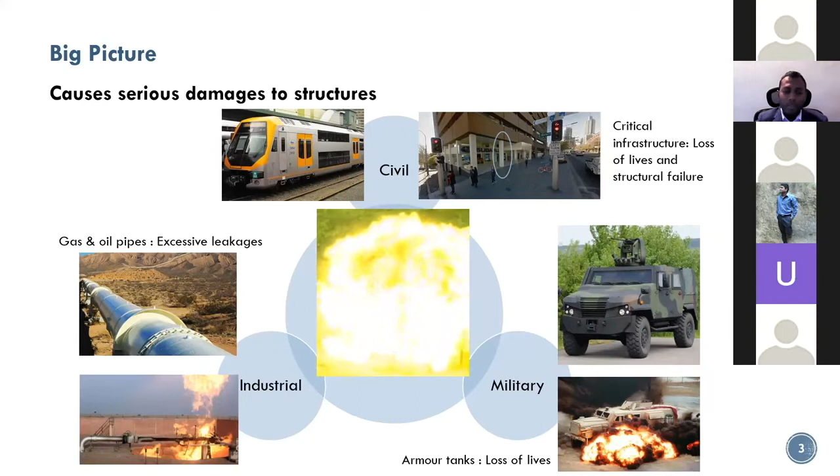So as you can see, if there's an explosion in any one of these structures, and of course the list can go on, it could be quite fatal, and it can cause serious damages to structures. And of course, it's not limited to structures. We as engineers, our main goal is to save humankind, and in doing so, we want our structures to be safe.

An explosion can cause serious fatalities to humans. Broadly speaking, we categorize the fatalities into two categories: primary and secondary. Primary is to do with the immediate explosion event - I'll explain what that is in the coming slides. Whereas the secondary injuries could be some of the after effects of the explosion. The primary injuries are the major concern, but even the secondary injuries can cause serious damage.

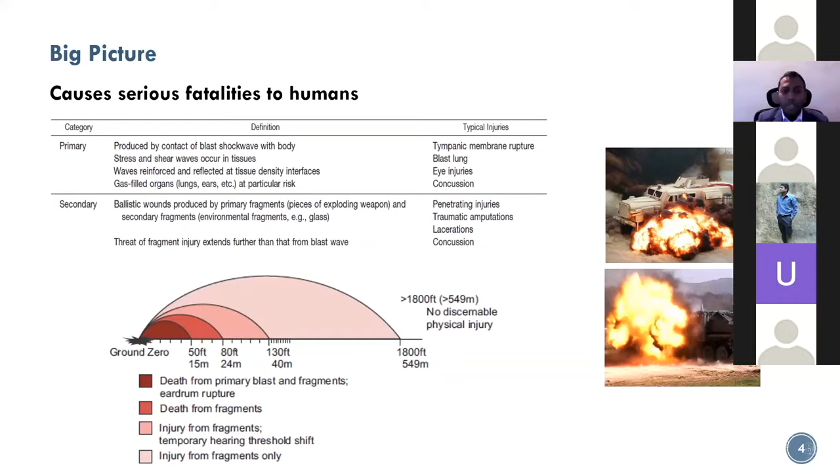Once again, this is not only limited to military applications, although the two photos I put on this slide are military related. If there were to be an explosion somewhere, the extent of the explosion is not limited to the immediate vicinity - you can feel it further away. So that is why it is important to understand what's going on when the blast happens.

To sum up this big picture idea, let me use an example - a roadside bomb that could hit an armor vehicle. So basically one thing that could happen is the structure - the armor vehicle itself can get damaged. This is the structural side of failure. Or the person or people inside the armor vehicle could be injured, or quite unfortunately could even be killed.

So there are two things that we are mostly interested in when it comes to blast, and I've summarized it here in this slide. One is the excessive pressure - there's this idea that there's a sudden rise in pressure when there's a blast, and that pressure can be felt by the people inside. That can cause harm to the people, and that pressure can also cause harm to the structures. And secondly, there's a phenomena called scabbing.

Now that's to do with damage to the structure. When this happens, there could be particles that are ejected out of the structure, and those can act as high velocity projectiles, right? So those are fragments that were not part of the initial blast event, but can contribute to the negative impact the blast could have.

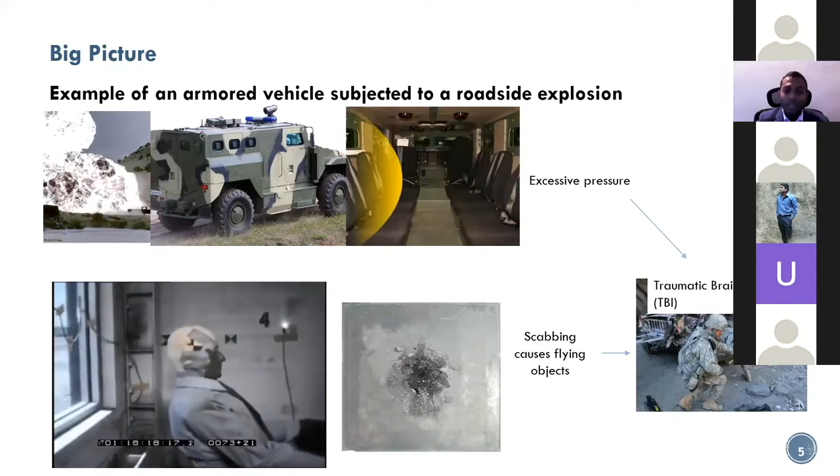So both these aspects affect what's called traumatic brain injuries. This is commonly found in most soldiers, but even people who are exposed to blast can experience these conditions. So I hope by this point you have an idea as to why blast engineering is important. It's not always very commonly followed when it comes to civil structures, but we live in a world that quite sadly is no longer safe, whether from intentional or unintentional explosion. So we as engineers need to be mindful of that to ensure the safety of our structures so that we can ensure the safety of its occupants.

So from this point onwards, I'll be cutting to that first point I mentioned about blast. So I'll be talking about blast now - how does a blast occur and what can it do, right?

Generally, in the creation of a blast, we say that there could be shock waves - sometimes we refer to them as blast waves, the terms are sometimes interchangeable. There's generally a violent change in pressure. Now, this is not only seen in blast - of course, things like the three images that I've given at the top also experience violent changes in pressure. But what we are dealing with in blast is a very unique situation, where all these things will have that violent change in pressure as the common factor.

What we see in blast is a very, very unique phenomena.

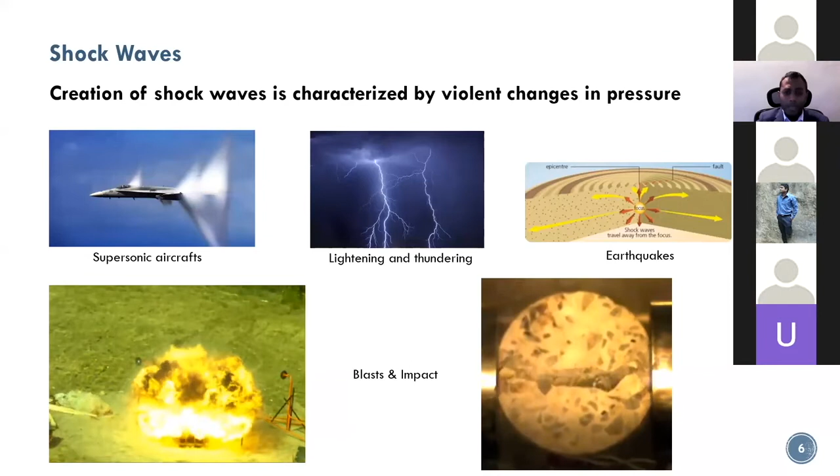So this is what happens in a blast basically. Firstly, there would be an explosion, or there would be an ignition. Sometimes we use the word detonation. In the case of weaker explosives, we use the word deflagration. That simply means that it starts. There is a blast.

The immediate thing that happens is there's an extreme rise in the temperature and the pressure. That's almost immediate, and it's very hard to even assign it a time. As you'll see in the next slide, everything I've shown here in this flow chart happens within a matter of milliseconds, so it's very hard to assign a time to this.

So the sudden rise in the temperature and pressure is then accompanied by the expansion of the gas. So the air expands. As a result of this, a layer of compressed air propagates outward. This is what we call the blast wave. So there's compressed air that is full of energy, that is at high pressure, that tries to move away from the source of the blast. This is what we call the positive phase.

But this doesn't stay forever. There is a sudden rise, and then that effect decays. We say that it decays exponentially, it decays almost immediately. Because of the overexpansion of the air, there can be a reversal of the flow, and this is what we call the negative phase.

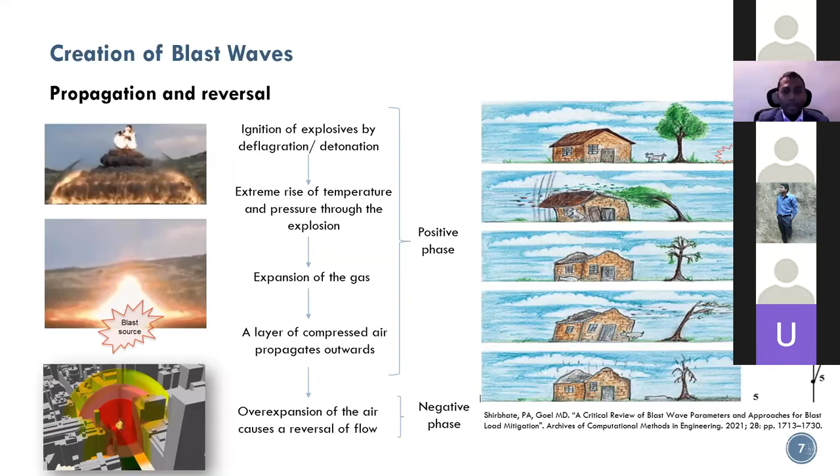So let me put that into a graph and bring in more engineering terms. Now you have a fairly standard idea of what a blast can do. But now as engineers, if I can put that entire sequence of events into a graph: if there's a blast at some place, this is the pressure time history you would see. The pressure, as you could see, is in kilopascals with quite high values, and the time is in milliseconds. As I told you, this entire event happens within a matter of milliseconds.

So a couple of things I want to highlight here. Before the blast occurs, what you have is the atmospheric pressure, or the ambient pressure. So for a few seconds prior to the explosion, everything's at that atmospheric pressure. And then there's a sudden rise.

On the horizontal axis, I call it the time of arrival. At a certain distance, within a matter of milliseconds, the blast wave arrives there. You can see even in the simulation running in the left corner, that red patch, the high pressure, starts from the left-hand corner and propagates to the right. So if you think of a point somewhere in the middle of that figure, it will suddenly experience this rise in pressure, and that maximum pressure is what's called the peak incident pressure.

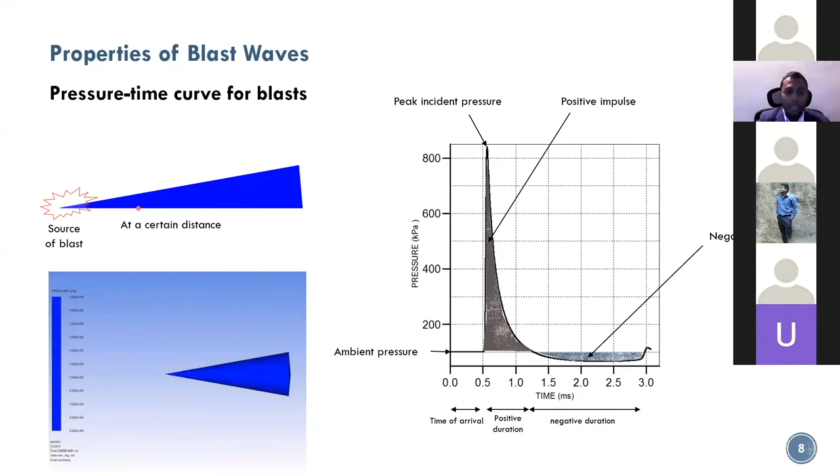So there's a reduction as you move away from the charge source, which is generally a good thing for us as engineers, because what this tells us is unless the blast happens in the immediate vicinity of a structure—maybe, not always—our lives are made easy because there is this significant decay in the pressure.

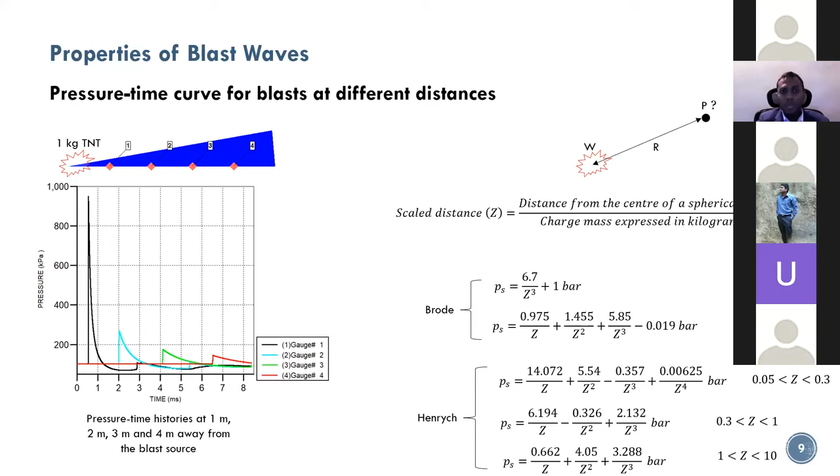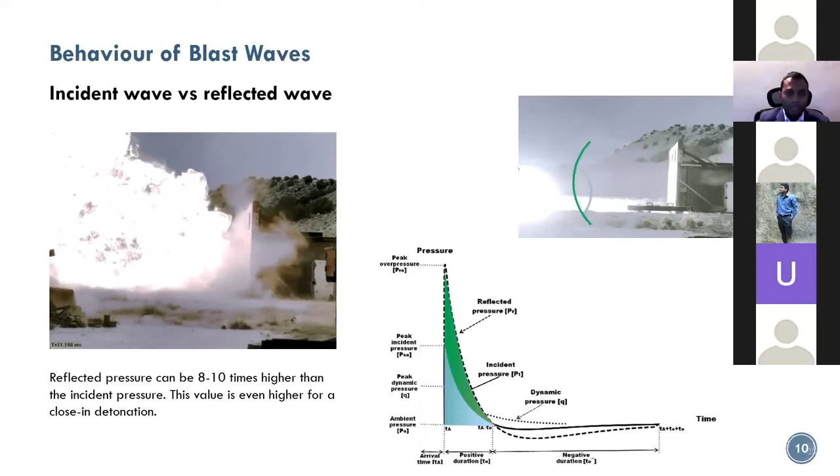When there's an air blast that's not necessarily free, part of it will go and hit the structure, but part of it will first hit the ground before interacting with the structure. There are reflections, meaning a significant increase in the pressure felt by the structure. You can also have a surface blast, when the source is on the ground—then we'll have a hemispherical blast wave propagating outwards, and once again we'll have to consider the effect of reflections from the ground. Depending on the location of the charge relative to the structure and the ground level, the effect felt by the structure will be different, because each case presents a unique situation for how the blast wave propagates.

So this is where the first part I wanted to cover—the blast side of things—ends. I just wanted to give you a brief idea of what a blast is. My next area is how structures behave when there's a blast. I know there's a Q&A at the end, but if there's anything you want to clarify before I move on to the second part, I'm happy to do that now.

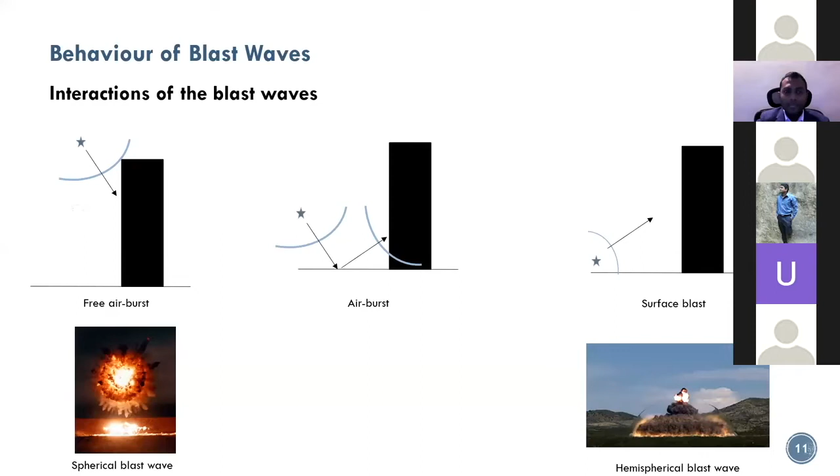It's like no questions. Right. Okay, we'll continue. Right.

By this point, you would have some kind of an idea of what happens when there's a blast. There's a sudden rise in pressure, but that pressure decays with distance. So these are some of the key things we observe when there's a blast.

Now when it comes to structures, we've identified that there are pressures and impulses that we can quantify when there's a blast event. So now we want to know how our structures behave when there's a blast event.

To understand this, first we need to understand a little bit of the way materials behave when there's a blast, because structures are made out of certain materials, whether concrete, steel, or any other kind of material. We need to understand what really happens inside a material if you have to accurately quantify the response of a structure.

So there are two ways of looking at this effect of the blast. I've categorized it either based on the strain rate, or based on the response of the material. Let me explain what I mean by those two.

The strain rate, which is not something we generally use in static loads, relates to the strain divided by time. It has units of 1/seconds, or 1/time. You can also explain it in terms of velocity divided by length for a given element.

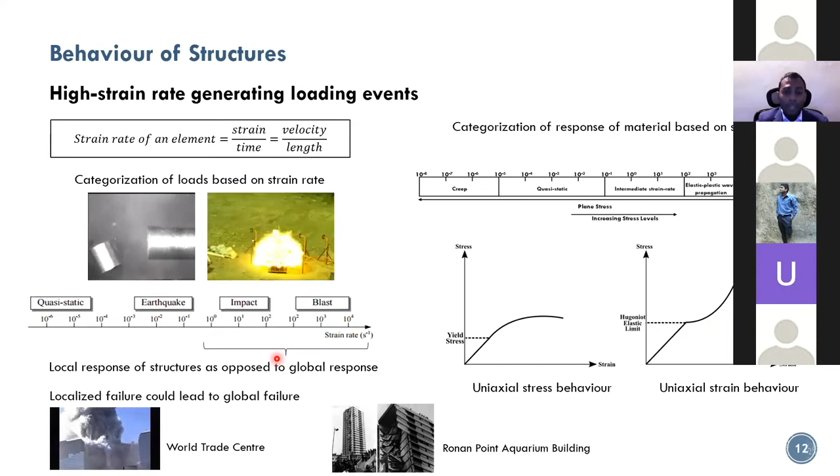But now when we get into the structure, the level of the structure, how do we determine the response of the structure? This is the question we're interested in as structural engineers, so I've titled this 'quantifying the structural response.' One of the techniques we have is using the single degree of freedom system.

This is something we commonly use for dynamic loads. Or we can use the energy theorems, because we know in a blast event there's energy dissipated as kinetic energy from the blast source, and these are absorbed as strain energy by the structure. So by comparing the two, we can also do an analysis, but this is a very basic way of quantifying the structural response.

We make use of the basic single degree of freedom system equation. We can use things like damping - I've excluded it here, but there's a certain level of damping in most structures that we can consider. We simplify or idealize the blast load as a triangle, not the exponentially decaying one I showed earlier. We can approximate it to be a triangle, and this is the traditional way of quantifying the structural response. The question I want to leave with you all is: is this a simplification of the actual scenario?

For one thing, we are simplifying the blast load - is this able to capture some of the complex ideas I told you earlier? Things like reflected pressure are very hard to quantify through this sort of model. This is where we actually need numerical simulations, finite element simulations, where we can model the blast event, simulate it, and see the full picture. I'll show you some of it towards the end of the presentation, but this is generally how structural engineers quantify structural response under blast. This is good as a basic estimate.

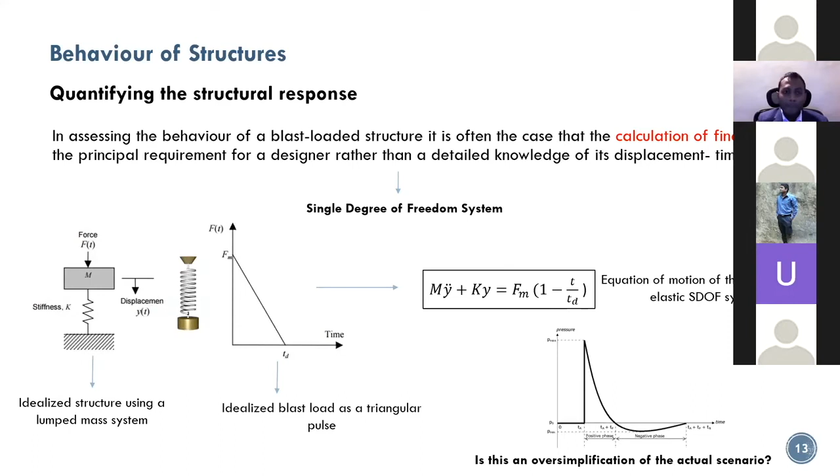Another key thing we want to know in terms of designing structures is how much structural protection we should offer a structure. The thing with blast is there are two things that make protecting structures very difficult for us. One is blasts are unpredictable - it's not like designing for static loads where we know the expected loads. You can design the structure to resist, say, 1 kilogram of TNT, but the next day someone can carry 10 kilograms of TNT.

So there's no guarantee that the structures we design are safe for any given scenario of blast. The blast event itself is highly unpredictable, so there's only so much we can do as engineers.

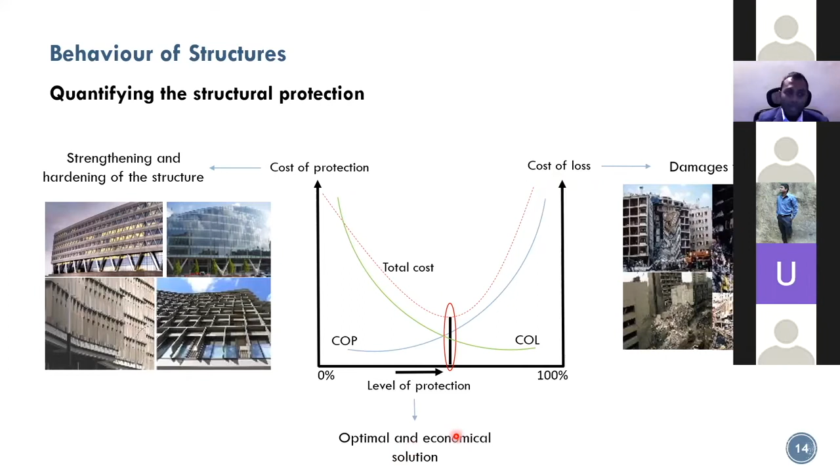We need to accept that there needs to be a certain degree of compromise between protection and loss, because there is no way we can offer full protection, nor can we allow full loss, since we are responsible for the structures we build. So it's important to quantify the level of protection we're going to offer to a given structure, and then we also need to be able to quantify the structural integrity.

The resistance time relates to the natural period of vibration of the structure, and even damping can come into play. In this initial region, we're dealing with impulse, but as we go further from the blast source, we're mostly interested in the pressure, because the pressure acts for a longer time compared to the time it takes for the structure to resist it.

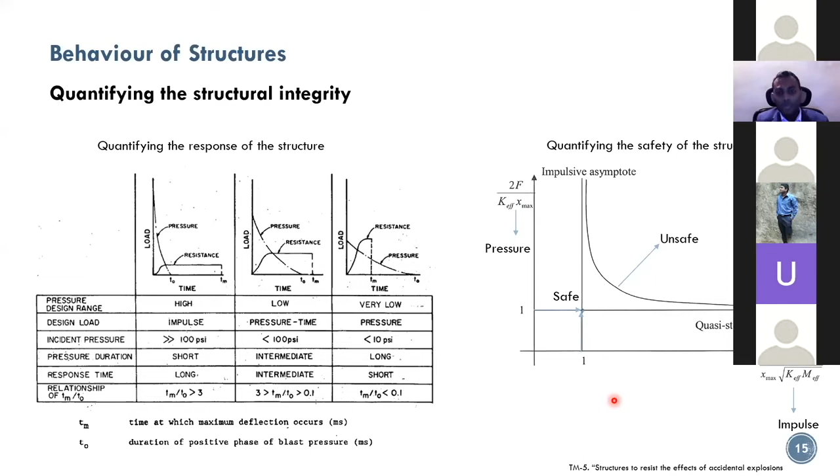One is barriers - barriers are where you expect the explosion to happen inside the structure, maybe because it's storing explosives, or even, like recent events in Sri Lanka, gas explosions inside. So our structures are to be designed as barriers. When dealing with barriers, we're dealing with internal explosions, so there could be internal reflected pressures, and we need to make sure we design our structures to resist that. To this end, we have the idea of vented structures when designing barriers - a more advanced version of ventilation, to make sure the gases that can cause explosions, as well as the excessive pressure when there's an explosion, can move out of the structure easily. We're creating a free pathway for it to move out. So that's if our structure is a barrier.

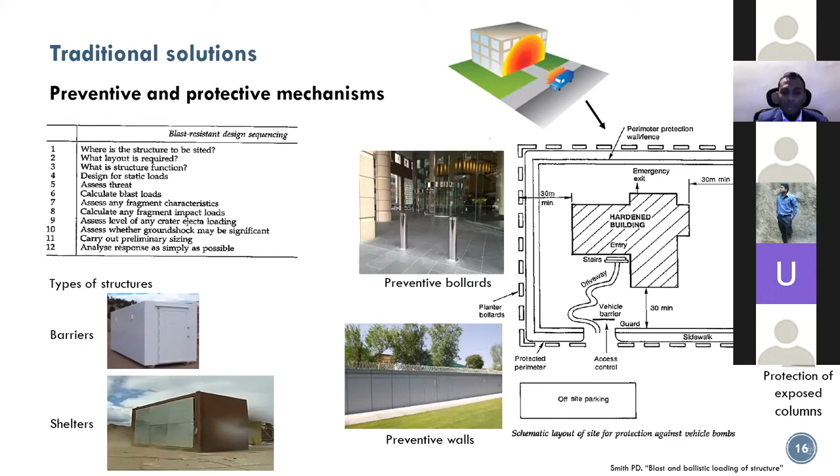So these are two ways of dealing with securing our structures. Either it could be preventive, avoiding any harm from reaching the structure, or in case the structure is harmed, we want to protect it. We'll be looking at some of this in the coming slides.

So this is where I'm going to enter into reinforced concrete structures. We now understand that we need to decide what the function of the structure is. The most commonly used material for building structures is reinforced concrete, and generally for blast engineering, reinforced concrete structures are preferred. I'll show you why in one of the later slides.

Now the material behavior under blast load is also very important. I showed you earlier the accurate description of the material behavior - it's a uniaxial strain condition, where the stress suddenly increases with the strain. What that would mean is the strength properties of a material also increase with the blast load.

So we factor that in using what's called the dynamic increase factor, DIF, where we multiply the static property by that. So the DIF is generally more than one, more than unity - that way a dynamic property is actually more than a static property.

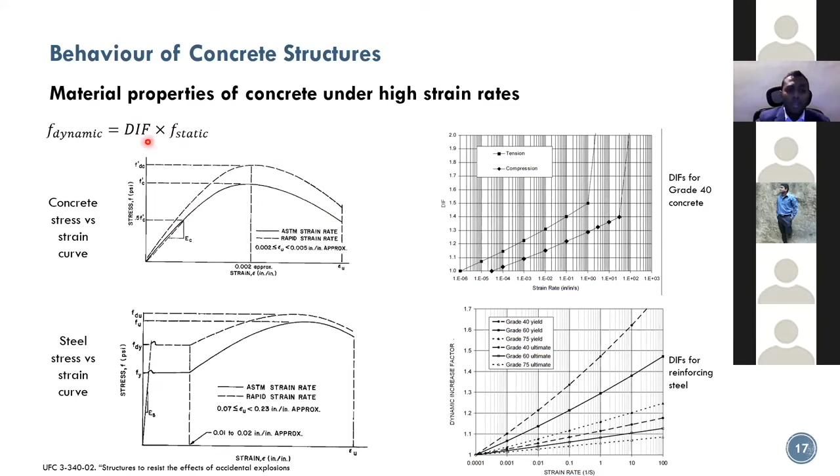So in terms of reinforced concrete design, generally when there's a blast load, the reinforced concrete element will try to absorb it. There's energy exerted onto the structure, and in the form of strain energy, the elements in the structure will absorb it. Under that, the elements will try to deform - so that is what you will get, elements deforming.

Some level of deformation the structural element would be able to handle, but beyond a certain point, you might start seeing failures - we call those failures, which can be either partial or total. To determine an acceptable level of deformation, we broadly categorize the rotation at the support. Think of a simply supported beam - you get rotations at the support. Depending on the angle of rotation, we classify failures into three types. The first type is where concrete is capable of handling the blast load on its own, as in the concrete as well as the reinforcement in it is able to handle the blast load - this is where if the blast load is small, it's able to handle it.

But if the blast load is more, if the angle of rotation is between 2 and 5 degrees, the concrete will crush and will not be effective in compression anymore. So we need both tension and compression reinforcement to carry that kind of deformation. Although the concrete crushes, the concrete cover on both surfaces will remain intact up to 5 degrees of rotation.

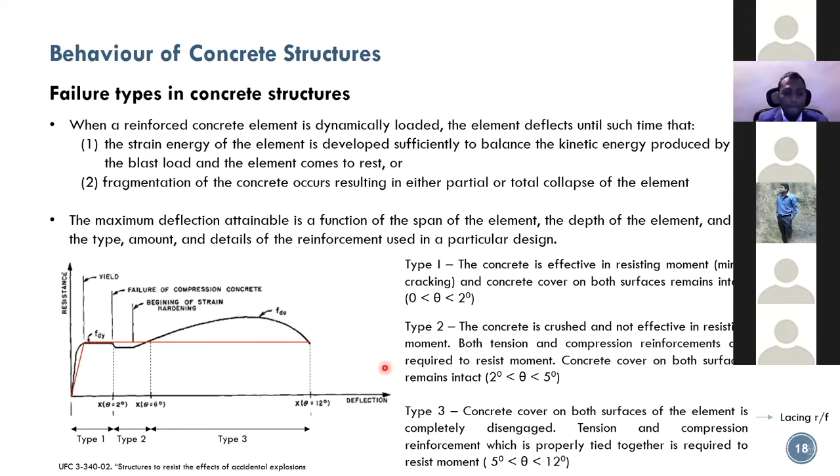So for the shear reinforcement, generally we have the single hook shear reinforcement if the blast load is from one side. But if we're expecting blast loads from both sides, then we need to have our hooks on both sides to make sure we don't create any failure planes.

But now this idea of lacing reinforcement is where it's like a spiral that connects our flexural reinforcement. So this is a stronger connection between our flexural, the tension and the compression reinforcement, than the shear reinforcement. You will get this for both our longitudinal and transverse reinforcement. So lacing is a very important aspect if you're designing blast resistant structures using reinforced concrete.

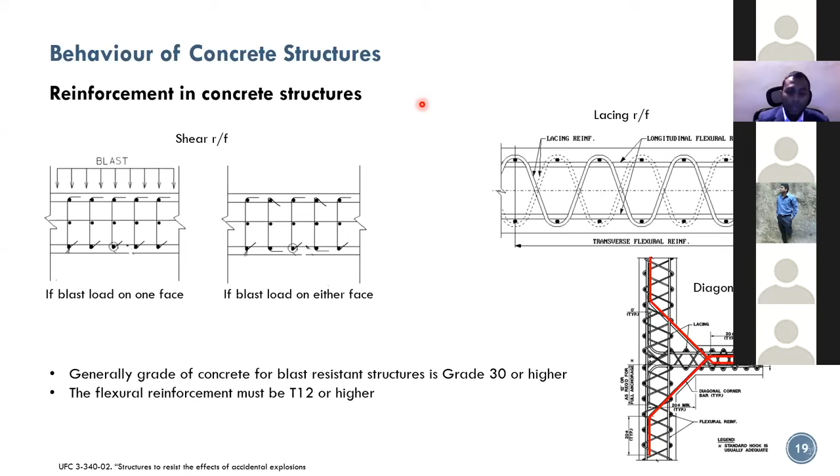Generally, for close-in loads, the steel will not be able to handle it, and there will be things like melting that come into play. Generally in reinforced concrete design, you can do separate designs for bending, shear, and torsion, whereas in steel, all that has been combined into one design.

And in designing the sections, generally we go for slender sections in steel, so you will get local instabilities and buckling that can cause serious effects. And also the joints, generally either welded or bolted, may not be as strong as some of our reinforced concrete joints that are heavily reinforced.

So because of that, generally you will find steel not as the entire structural element, but as certain parts of a structure, for example as a door. So when you're only fabricating parts using steel, you're able to control the properties and come up with a structure that can resist.

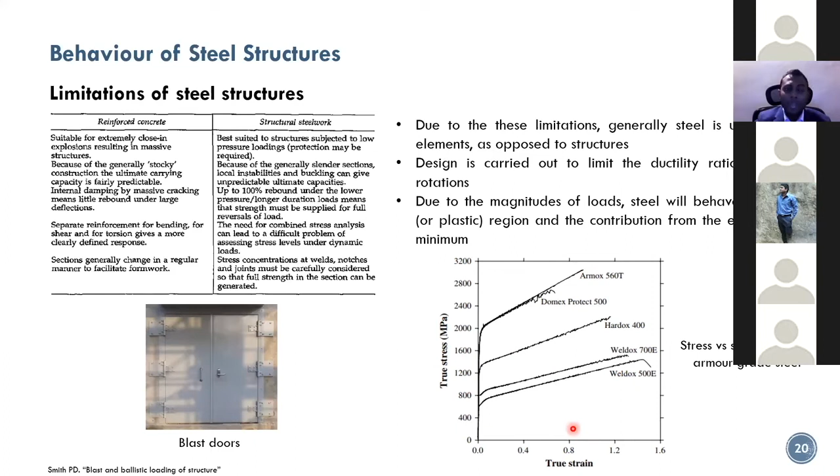So to wrap up the presentation, this is the last bit where I'll present some of the more innovative methods of enhancing the structural resistance of structures expected to undergo blast loads. This is directly from the work of my thesis.

Okay, I have a question. If it's okay, I'll answer that soon. Will the ductility or brittleness affect the behavior of structure during blast?

Yeah, it plays a very significant role. I might explain that more in the coming slides with this idea of my thesis. You need ductility basically. Enhancing the reinforcement in reinforced concrete is a way of enhancing the ductility. Generally, the expectation is that you let the structure deform, because there's a high level of kinetic energy exerted from the blast onto a structure. There'll be a lot of strain energy the structure will have to undergo, so you have to let the structure deform. When there's significant energy, you need to let it deform. If you want it to deform without failing, then you need ductility, because if not, it's brittle, and you will basically have catastrophic failures, right? So ductility plays a significant role.

So coming back to this slide, what I proposed in my thesis was a multi-layered system, or a multi-material system. The inspiration for that is, of course, you see multi-materials and multi-layers in nature. Almost all the things we see in nature are either multi-layered or multi-material. What we see is the materials are arranged in a certain way so that it can fulfill a certain function.

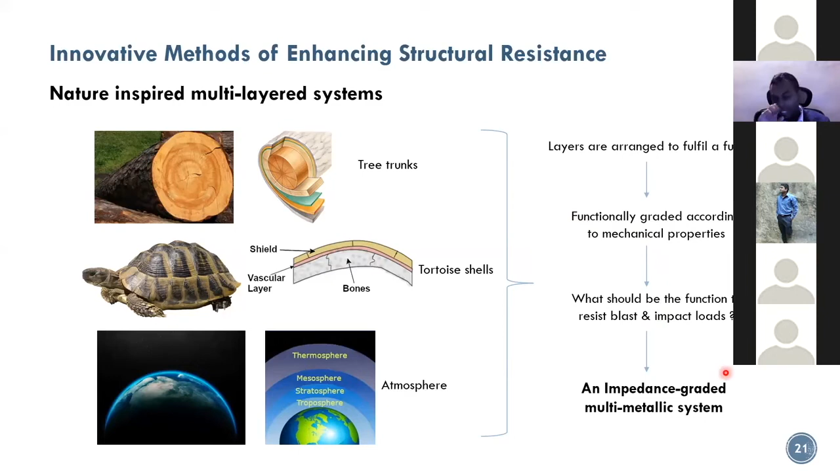So what I proposed was an impedance graded system. This property, impedance, is to do with the density times the wave propagation. Density is something we know. Wave propagation is that idea I explained a few slides earlier.

Now when we are dealing with blast loads, we need to think of it as the structure getting loaded in the form of waves that propagate through the structure. The accurate way of representing a structure under this kind of loading is to consider the wave propagation. Because of that, impedance becomes a suitable candidate to design a material system, because by changing either the density or the material type, you can change these properties.

So what I proposed was, if we arrange the materials, as you can see in this figure, in reducing order of impedance, with the material with the highest impedance facing the structure, facing the load - so we think of an incident wave. It goes and hits this interface between the first two materials. Part of it gets transmitted, part of it gets reflected.

This is similar to what happens in an atmosphere. Not all the rays emitted by the sun reach the earth. Some of it reaches the ground, some gets transmitted, some gets reflected. That's to do with the properties of the different layers we find in the atmosphere.

Similarly, if you design the system so that the impedance reduces through the thickness, we can cause some of the stress waves to reflect. So only part of it will get transmitted. This way we can reduce the effect of, or reduce the magnitude of, the stresses a structure would experience. So that's the idea.

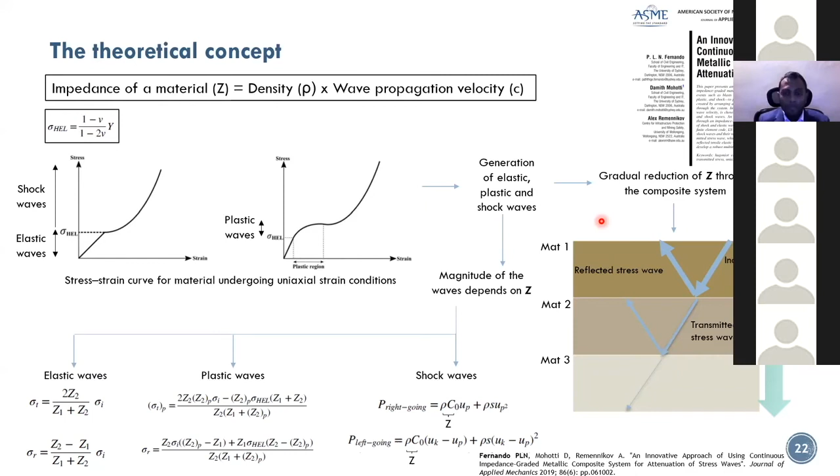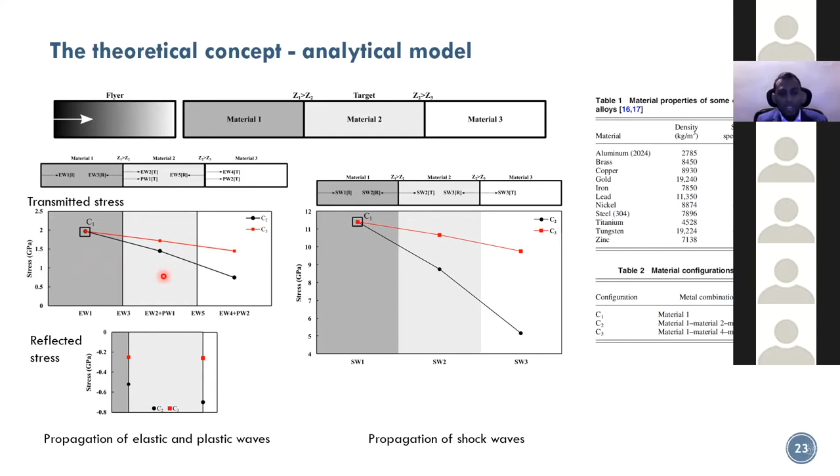So this was the basic concept that I proposed in the PhD, specifically in relation to blasts. To test this idea, we had to fabricate a multi-metallic system consisting of steel, titanium, and aluminum.

Welding is the way we generally connect materials, but normally the standard way is fusion welding. That won't do because these are different materials with different mechanical and thermal properties. So welding different materials is not an easy task, and we had to propose a rather innovative method called explosive welding.

If you want to connect steel to a titanium plate, you place the titanium plate at the bottom, the steel at the top at a slight inclination, and cause an explosion at the top of the steel plate. As you can see in the video, without melting, because of the explosion, the steel will go and hit onto the titanium. In that impact zone, from one cone to the other, a jet gets formed and moves away from the source of the explosion, causing the surfaces to peel and bond well. This was the new material system that we came up with using this technique.

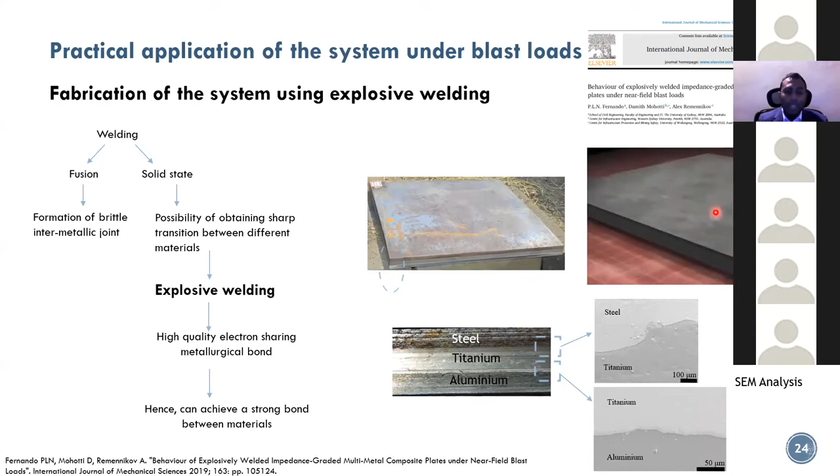We tested this for two kinds of charges. One was contact charges, where the charge source is almost in touch with the material. We first tested a steel plate as the reference, and then tested the new multi-material system. When we had a steel plate at the back surface, we saw scabbing.

I explained what scabbing is earlier - this is where, because of tensile failures, material can get ejected out of the system at the back face. We saw scabbing when there was only steel, the monolithic plate. But when combined with the multi-material system, we didn't really see that. We saw a small rupture by shearing, but that was because the aluminium we used as the back material was slightly weak. If we used a stronger grade of aluminium, we would have been able to prevent the damage, as shown in the second figure.

If you compare this with what you see here, this new material system has been able to withstand the blast load. It has deformed - obviously it deforms, this is where ductility comes into play. You can see significant deformation, which you cannot avoid, but it does not fail. When it fails, generally with blast loads, that's when the structures fail and we start to get worried.

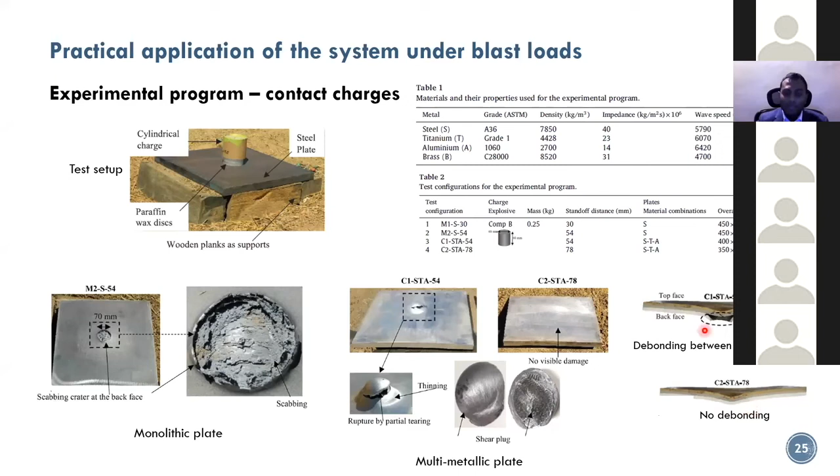We also tested it with the blast source slightly away, about 250 millimeters from the plate, and this way the damage is much less. What was interesting about this experimental setup was that we were able to get real-time deflection histories. We inserted an instrument inside the blast rig - this is the charge, this is the plate. You explode this, then the plate deforms, and we measured the deflection using a deflection meter placed inside, capturing the variation of deflection with time. All this happens within a matter of milliseconds.

The significance of this is that when we use simple quantification methods like the single degree of freedom system, you are not able to capture all this - you'll just get one final answer, maybe the maximum deflection or the residual deflection.

But in reality, when there's a blast, there's more going on than the extreme values. So if you have to accurately capture those, you either do experiments or use numerical simulations.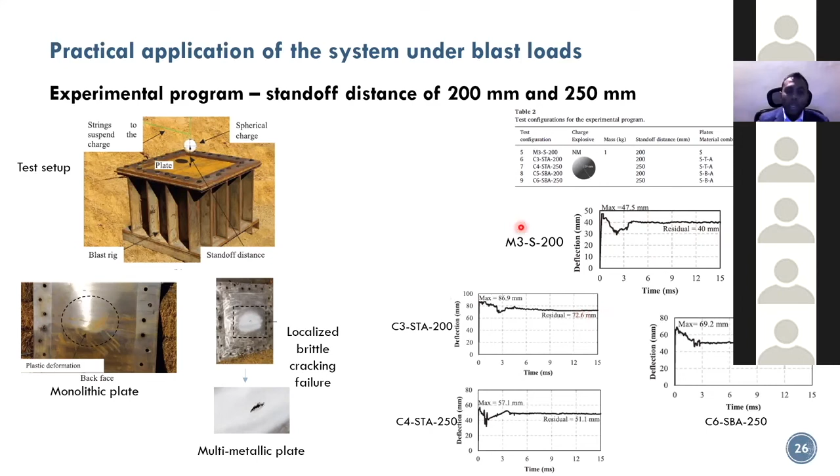Modeling it this way allows you to identify the pressure variations in the air as well as the deflection of the plate. You can get something similar to what the experiments gave you. If I plotted the deflection variation of the plate using this model, we've got something similar to what the experiments gave.

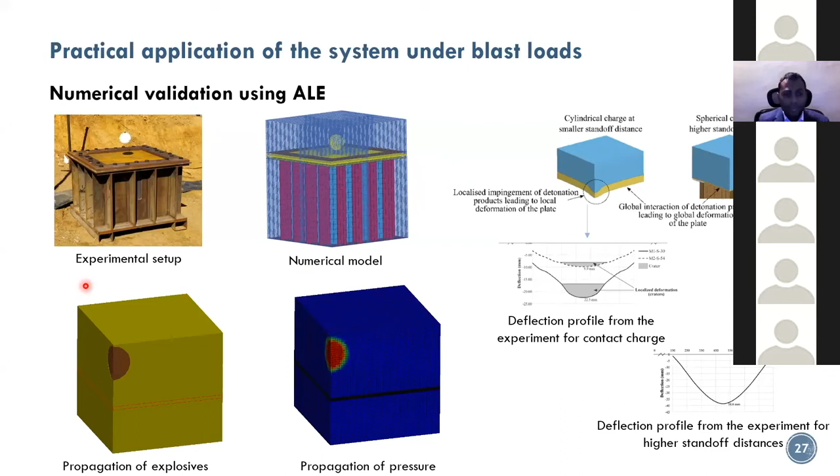What this system does, IGMM is the impedance graded multimetallic system. This allows you, compared to only having a single material, to do what's called attenuating - that is, reducing the effect of the magnitude of the stresses that gets transmitted. So when you create barriers in a system, you can reduce the stress that gets transmitted.

By doing that, we are preventing any major kind of failure. Spalling is the critical failure in these cases. Spalling is effectively a tensile failure - it's to do with the tensile stresses that get developed generally towards the back face, the face away from the blast.

So what we are doing here is we are reducing the stress gradually through the system so that by the time you get to the last material, our stresses have reduced significantly to the extent that you will not get tensile failure.

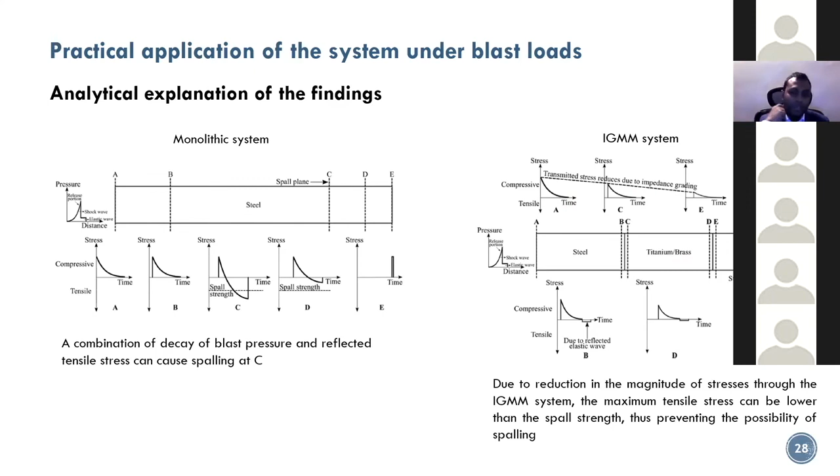Another way of enhancing the effectiveness of say steel to resist blast is actually using polymer or polyurea. There was another experimental program where polyurea coated steel plates were tested for the same blast setup. We did a set of tests with polyurea at the front of the plate and then at the back of the plate. Having it at the back of the plate was more effective for the reasons I've given here.

Of course, introducing a new material into the system would mean that your weight increases, but actually when you plot the gain in terms of the reduction in deflection with the gain in terms of density, within a certain region, polyurea is able to show beneficial action when it's used with steel plates.

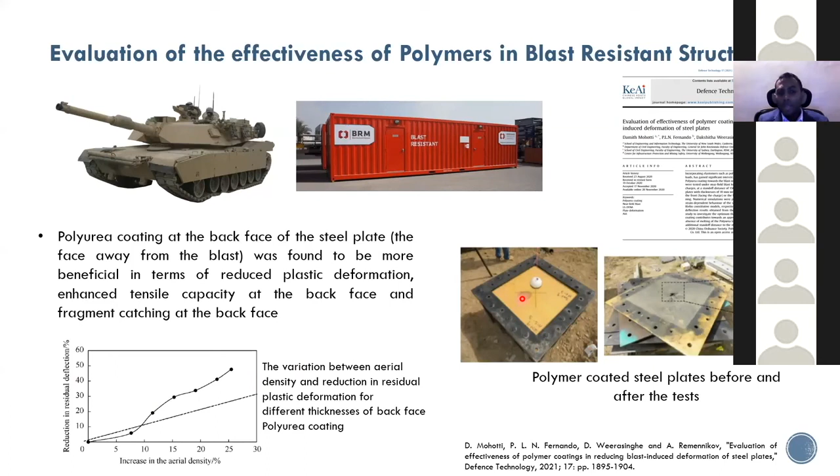So that is another way of making sure that our steel structures are safe. Existing steel structures, you can add polyurea layers to it. It's like a retrofitting technique where we can make sure that we enhance the resistance of structures.

So in conclusion, I've listed down a couple of conclusions based on the three aspects I covered. The first aspect was what is a blast - it's highly unpredictable and very intense, which means it's a very challenging type of load to deal with, and its unpredictability is a serious concern for engineers. But within a certain theoretical framework, we have a fair bit of understanding of how the blast load works.

The second aspect I touched was how our structures react, or what's the response of the structures when there's a blast. My conclusion is that we need to consider a holistic design approach. The design for blast needs to be incorporated very early in the design stage. It can't be an afterthought - it has to be part of a broader design process that needs to be incorporated.

And also in terms of resisting - this is the question that I answered as well - it's through enhanced ductility that our structures resist blast. We allow it to deform, but we don't let it fail. So we need ductility for that. In line with that, some of the work I presented, from my PhD work, is related to that, where we increase the ductility through an impedance graded system.

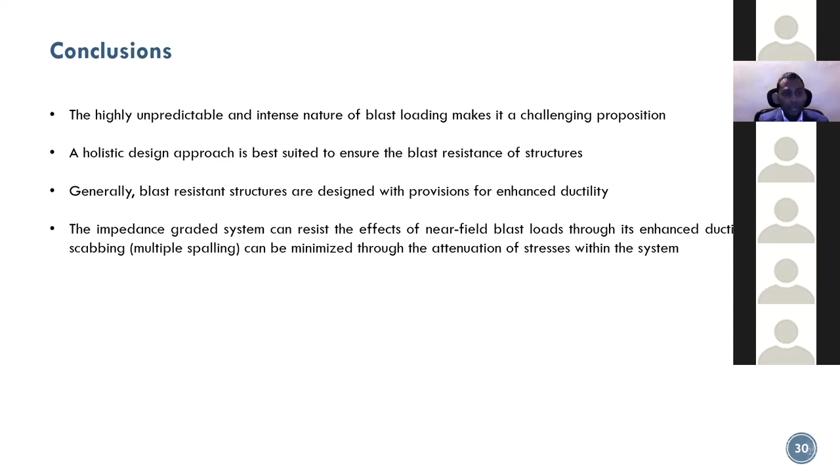I would like to acknowledge a few people, Dr. Damith Mohotti, my PhD supervisor, who introduced me to this interesting area of dynamic loads. Most of the latter half of the work presented here was for my PhD, so I'm grateful for all his supervision. I'd also like to thank the co-authors of some of the papers we published, listed here, as well as the respective universities who helped with some of this experimental work, and my research colleagues at University of Sydney who were part of this work. So once again, thank you for the opportunity to present this work in this forum, and thank you.

It's really appreciated, Lakshita. I personally thank you, it's a wonderful series, one lecture, and it's a sophisticated one, I hope. But anyway, I call Engineer Sapumal. Are you there? Yes, madam. Yeah, I think give a good thank you for this presentation. Thank you, madam.

Good evening to all of you. That was an interesting and informative session. On behalf of the Civil Engineering Section Committee, I would like to pay my gratitude to Engineer Dr. Lakshita Fernando for sharing your knowledge, findings, and experience on blasts and their effect on structures under today's topic, blast resistant structures. We were able to learn about the latest findings on blasts and explosions and their impact on structures, and the blast resistant structures. I think these findings and things we learned today would be very helpful for future design, as we learned many lessons on blast from our history.